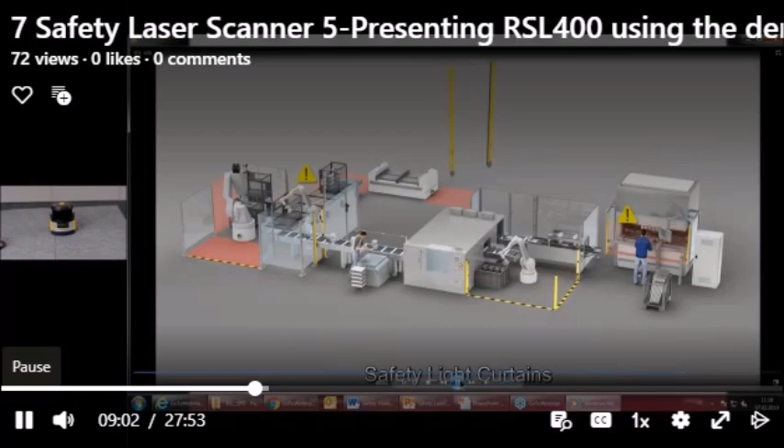So what I mentioned before, you either can do this using this video clip, then everything is done on its own, let's say, or you do the same things we have just seen by presenting the items using the brochure or the PowerPoint.

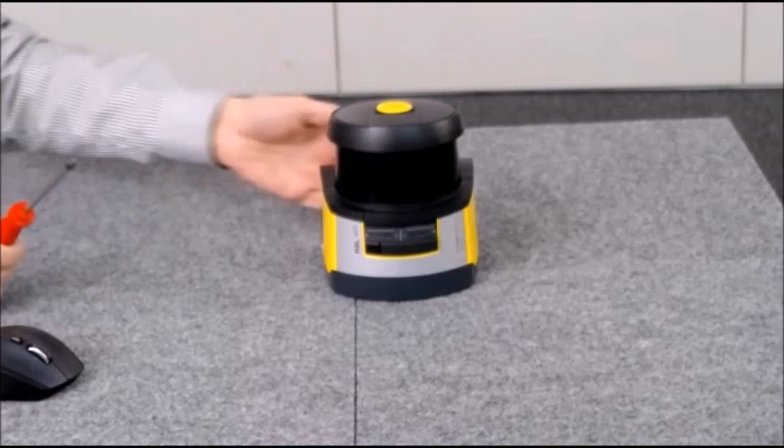Once this is done, and I said this is now for a quick presentation, what I suggest to do is when you take the hardware from the demo case and show a few elements what we have seen before.

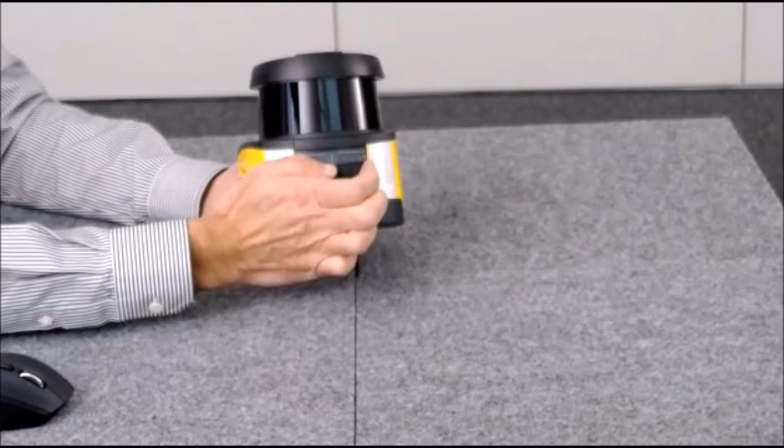I think what is worth mentioning is this is the area where we see the built-in display. We have the USB interface here installed at the front of the unit. That's good to show. Show the different ways how the connection works.

We have the power connection in the middle. We have the Ethernet connector as a standard for all our devices, networking capability for all our devices.

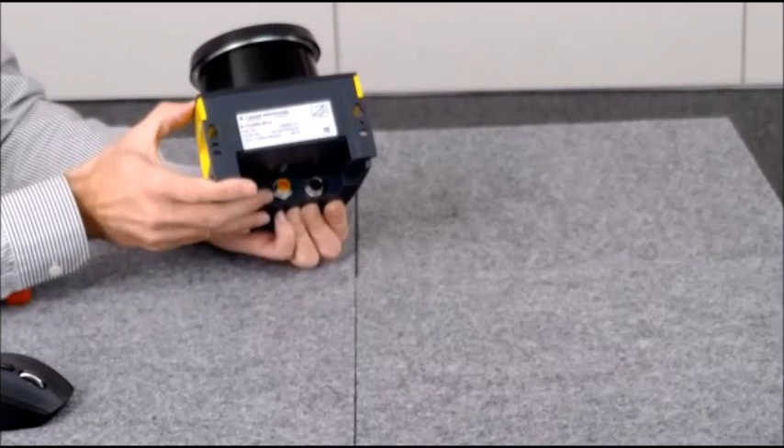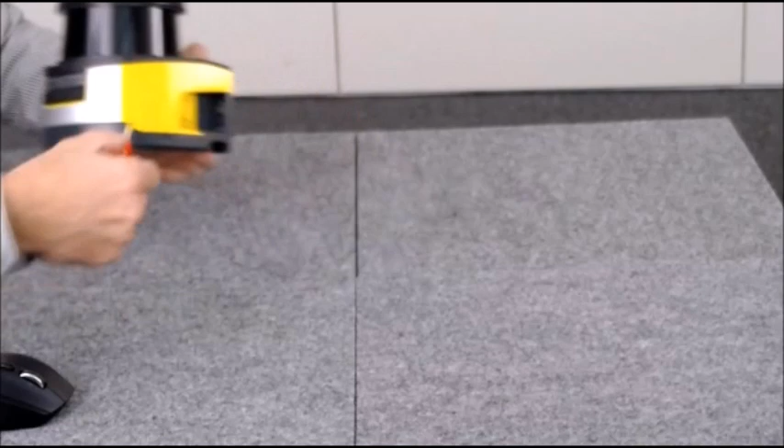And what I think is always very impressive to do is also show the detaching. That's why I said to make sure you take a screwdriver with you when you go to the customer, because now you can show one quarter turn, another quarter turn on the other side, and how easy it actually is to detach the scanner head from the base unit.

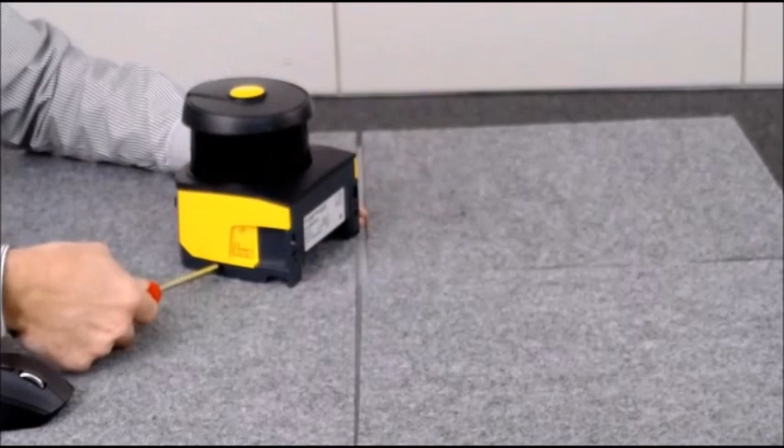What always works pretty well is also giving the base unit on its own to the customer. They are always interesting to take something in the hand, look at the hardware, and at the end put it back here with just the two screws again, and the unit is back to operation, as we would say in practice. So just a few things.

Give the hardware to the hand of the customer, explain some of the highlights, and this would be the approach for a very quick 10 to 15 minute demo.

Next, we will talk about how to extend the demo if we have more time available, for example, at least 30 minutes. Therefore, you see I have connected the unit now to the power supply as well as to my computer. And the things we would like to show in addition now are some live parts.

You have here a little note on your presentation about what I will be showing next. So we will show how the RSL works in practice when we trigger the protective and the warning field, some messages on the display, and also a little demonstration that the RSL, due to its high resolution, is able to distinguish a pen, a small device, from a larger device.

Well, first what we need to do when the unit is connected, we need to open Sensor Studio on our PC. We will see in the How to Configure session there are two parts of software needed. So I open Sensor Studio on my PC, I select the RSL, and then the software will search for the connected RSLs to the computer.

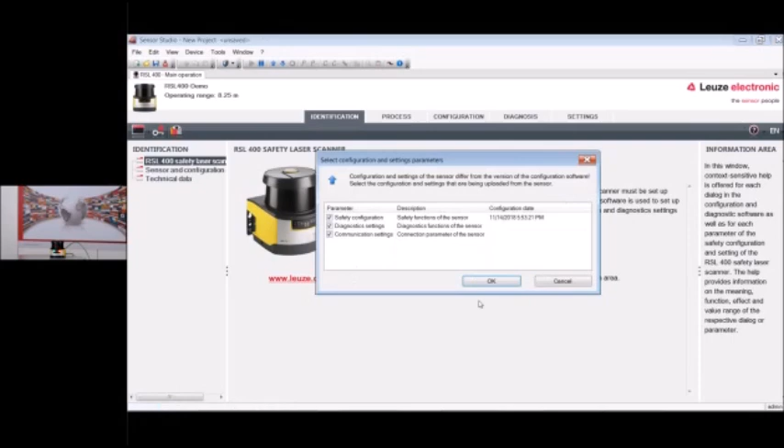So I do see the device here, press next again, and then the Sensor Studio software will open and will connect to the RSL device.

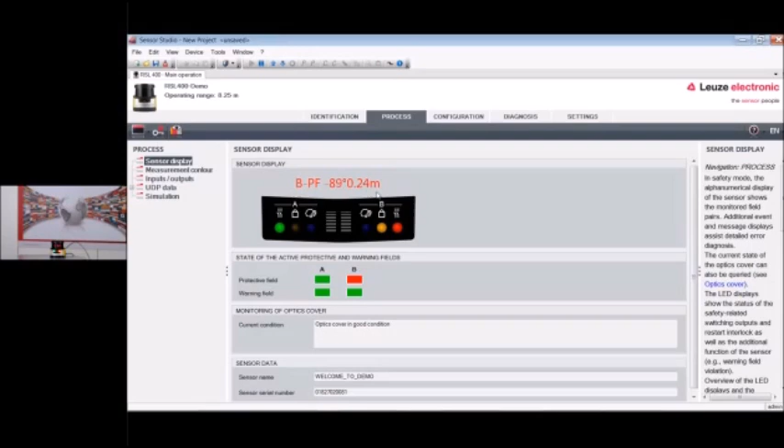Well, the first thing which is good to show is what the unit is seeing right now. This is available here in the process button. First you see a kind of online view of what also the unit is showing. So you see on the smaller image, the live image right now, how the LEDs are blinking in front of the RSL.

Actually, this is due to this cable, which is a little bit in the way of the scanner. So now everything is green. The scanner is working perfectly, no interruptions, and we can take a look at the so-called measurement contour, so what the scanner sees from its environment.

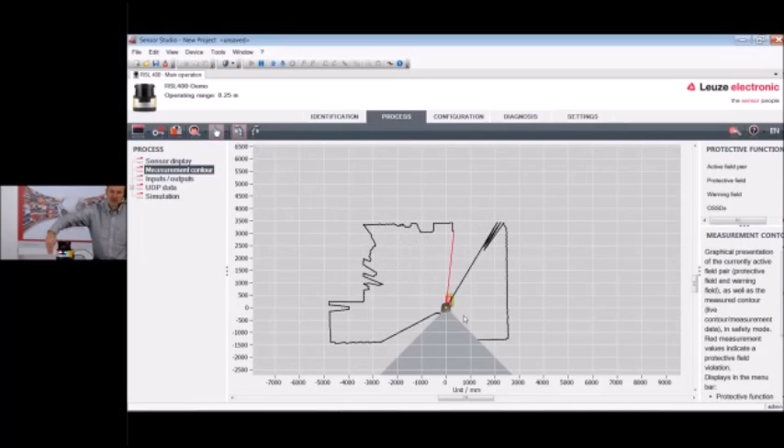And right now we do see myself. You see when I'm moving here on my chair, you see this, and I will go a little bit closer here to our live image. So if I move my hand around the scanner, you easily can see how well the scanner is detecting the contour of my hand.

The other circle or rectangular shape we see here is the shape of the room where we are presenting right now. This may be a first step, because if you're in a customer's environment, usually in a meeting room, you would see the meeting room and maybe even some people sitting in the room showing this contour.

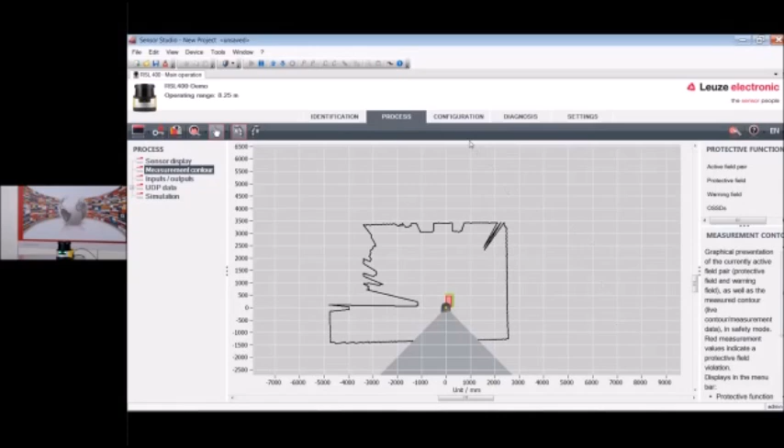Next, let's take a closer look at the protective and the warning field. I'll zoom in here with my mouse. You see two fields I have configured, and to show this I need to get a little closer to the unit again.

If I trigger here from the side with my hand, getting closer to the unit, you first see the green field, the warning field, being triggered. You see the blue lamp on the RSL switching on, which indicates a warning field violation.

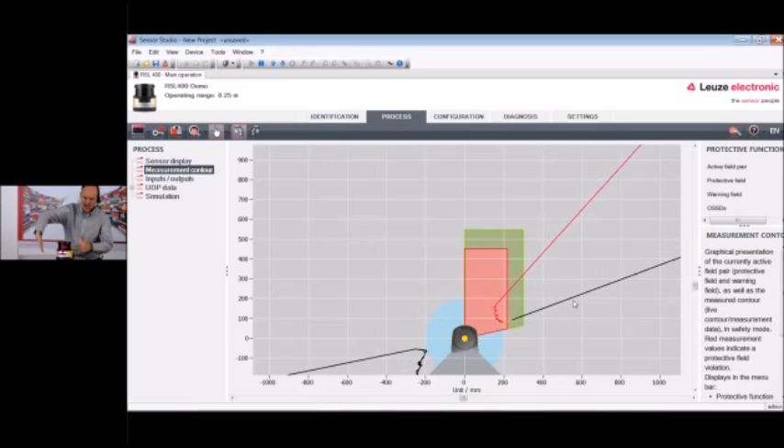Then I get closer to the red area. The red LED switches on, which triggers a protective field violation. At the same time we also see the information on the screen, on the display, which shows what's happened on the scanner right now.

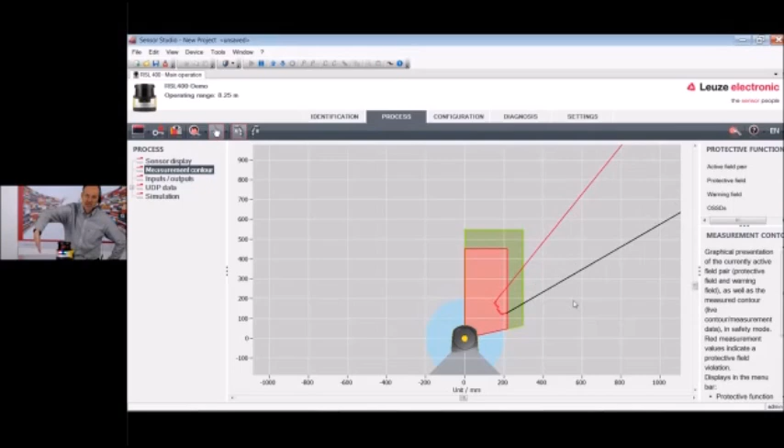You see here the information about a distance and an angle, and this is where the scanner detects the protective field violation. In this combination, it's also a good way to show the integrated display, as well as the principle of how a laser scanner works, how well we can see everything here in our software, and how it triggers the different status information.

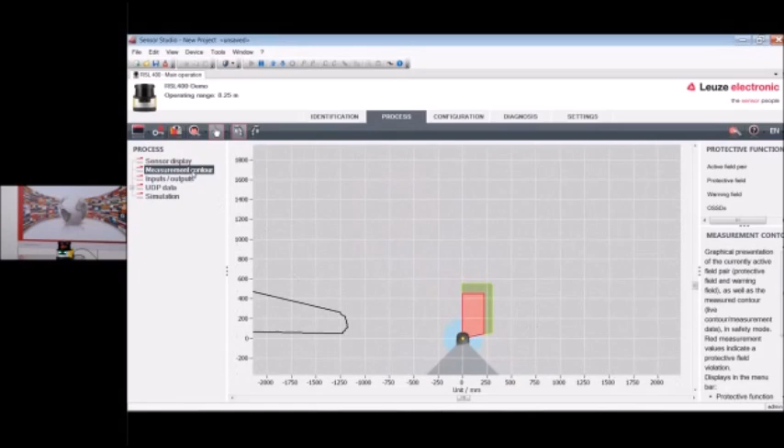Also, what you see here right now, we changed this last year. If I go back to the sensor display, this is the online view. On the small image on your screen, you see the two LEDs, the green ones.

Last year we changed the concept of the LEDs. They are very bright right now. You also see it here. That's also something good to show in the demo. Even if you are far away from the scanner, you very well see the LEDs, and you very well identify the information on the display.

What's also a good idea to show is the integrated spirit level. The spirit level can be switched on manually by going to the diagnosis page, and then you see here this little symbol of the spirit level.

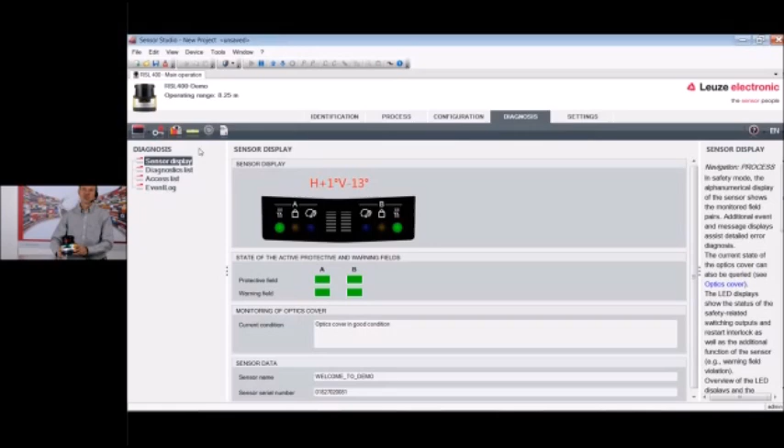So I switch the spirit level on, and again you see the information here in our Sensor Studio software, but of course this is something you would show the customer on the display. By moving the RSL, you can see how the spirit level inside the scanner works, and all the information is available on the display.

Another good part to present is the capability of the RSL to distinguish a smaller object from larger objects. So here there is again a protective field being configured.

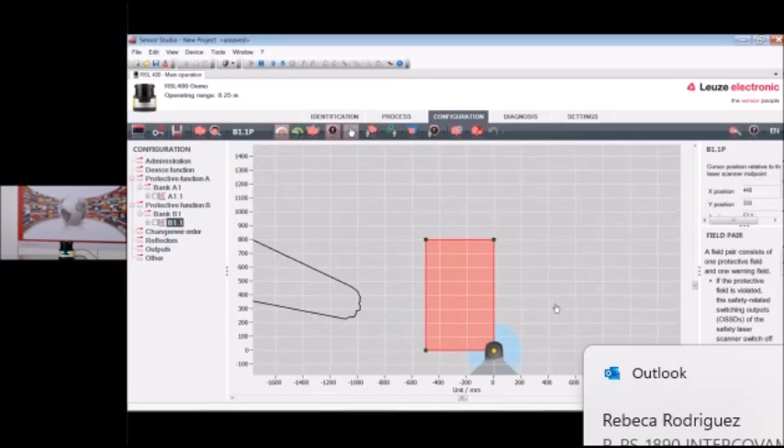We suggest that you use a protective field like I have here, which is at least about 80 centimeters, or maybe even a little larger, because this ensures that we can see this effect in a very good way.

Because what we do right now, we have to watch the LEDs at the unit. So obviously if I put my hand inside the protective field, we will see the red LED switching on.

And now I will come here with a pen, for example, from the top, and I will put the pen inside the protective field. I can move the pen around inside the field. You see it very well here in our online display, but at the same time you also see that whatever I'm doing with the pen, the scanner keeps running with the green LEDs, so it's not switching off.

That's also a very good effect to show during a presentation. The hand easily gets to the red light, but the pen inside the field remains with the green light.

Now we have seen most of the online presentation with the unit being connected. We did see the contour view, we saw the messages on the display, we saw the pen in the protective field. And if we want to do the demo in a little more in-depth way, there's a second page of recommendations on what to do.

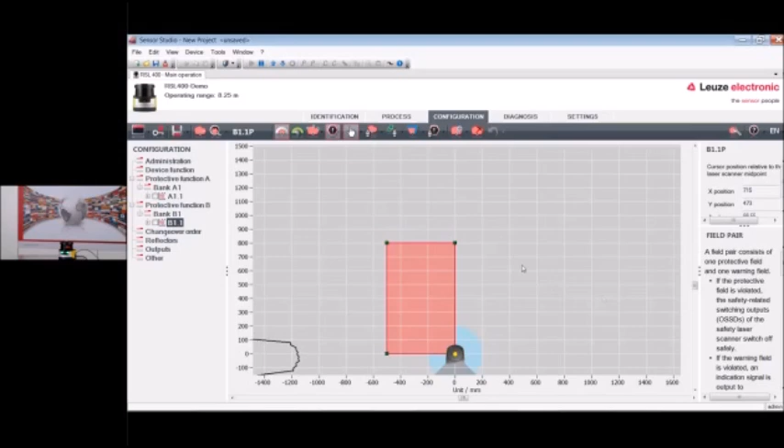Another point to mention is our built-in online help, which you see on the right hand side. For example, if I go to one of the configuration tabs at the beginning and select the item resolution, just as an example, you see the online capability explaining what resolution means. So online help is one of the features we can show to the customer.

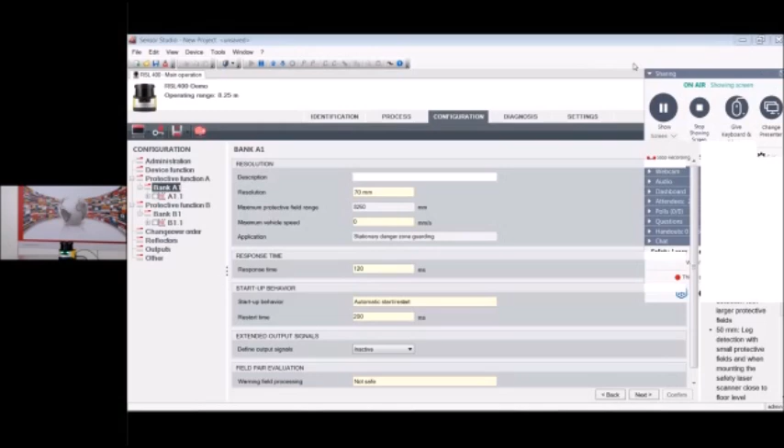And we also see here on this tab all the different languages we have available. This is at the very right. You see English being selected right now.

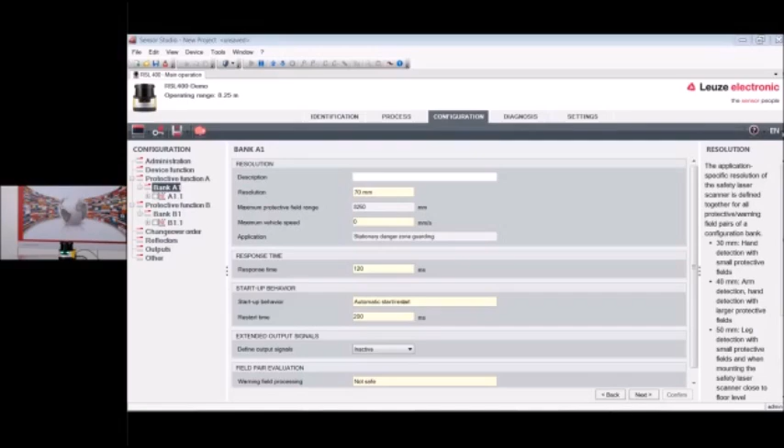At the very right hand side we see the English selection at the moment, and we can show here all the different languages we have available and which are supported in our software.

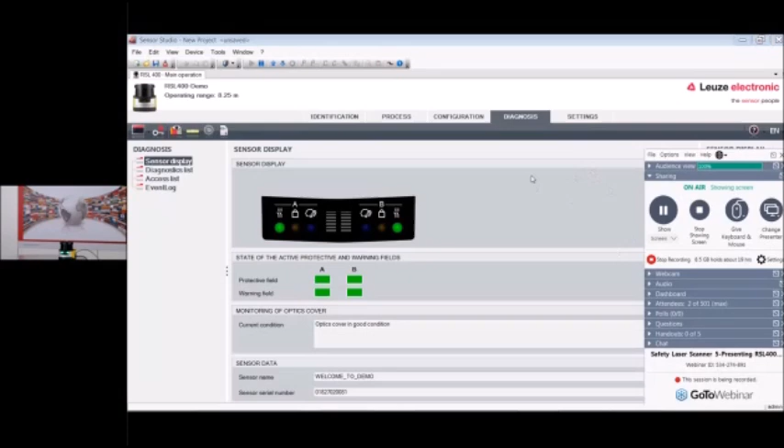I mentioned I would like to talk about the capability to do an automatic suggestion of a contour. To do so, we need to go to the configuration page. There's also one point which can be helpful for us: this little icon that says reset all safety configurations.

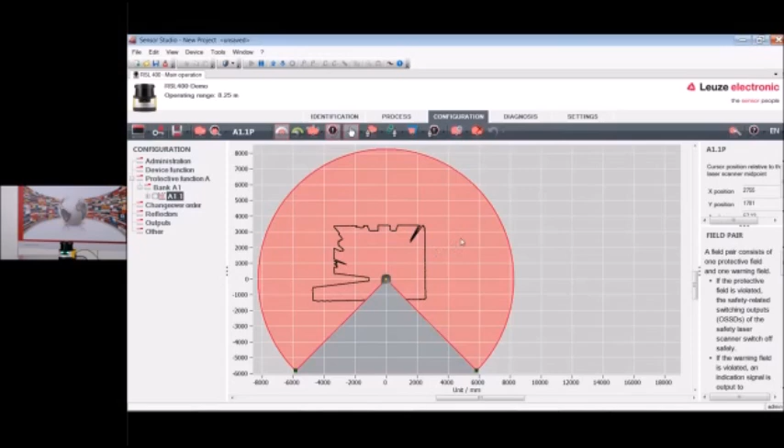What I will do in this case is that, so the unit goes back to factory settings. This is kind of the default page we will see, as said, setting in more detail on the next session. What I will do right now is I delete the contour.

Zoom in a little bit here so we can see our room better. Now I would like to show you how the scanner is able to suggest the right dimension of the safety field automatically. This is implemented here under this icon, called Create Contour Suggestion.

The RSL knows all the settings and knows the safety distance calculation formula. So for example, you see here the response time of the RSL, and the addition of 100 millimeters we have to do due to the size of the safety field, the working range.

What the scanner does not know is what is the stopping time of the entire system. So all the elements following the RSL, like the safety relay, safety PLC, and of course the stopping time of the machine itself, this is what needs to be entered in this field. We took 200 milliseconds as an example.

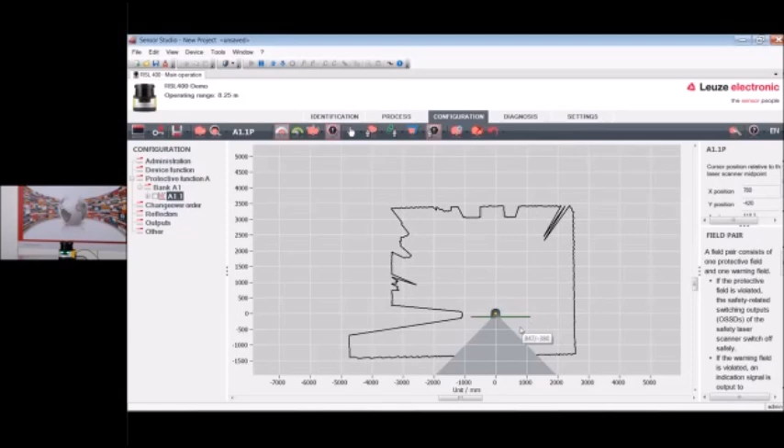We have to tell the scanner where the dangerous area of the machine is. Therefore, there is another icon up here called Define Danger Zone. So this is what I will do right now. I will define the danger zone just behind the scanner, indicating that right behind the scanner there is a danger zone exactly as big as this green line.

So now the scanner has all the information to automatically check about the dimension of a safety field. I start this process, press accept, and now the scanner has defined automatically the size, the optimum size of the safety field.

So why does it look this way? This is the danger zone, and what the RSL does, from any point on this green line, it is drawing the safety distance. It has calculated that the safety distance is about 1.7 meters. So here is a green line, and here we see a parallel line at 1.7 meter distance. Then there is a curve, because this is due to drawing a circle around the end of the line.

And the very nice thing is that this field is automatically fitting to the wall, or this, by the way, that's myself at the moment. So this could be a post, for example, in a hall. It's automatically drawing around any fixed boundary which is present in the view field of the RSL.

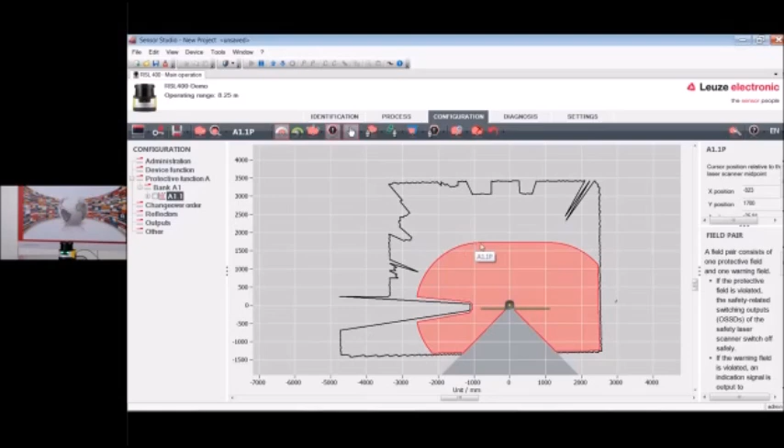So this is a very convenient way to do this automatically, and the curve shape is due to the safety distance calculation. Of course, there are many other ways how to do this safety field identification. I go back here, and I will also delete this danger zone, so we are back to zero.

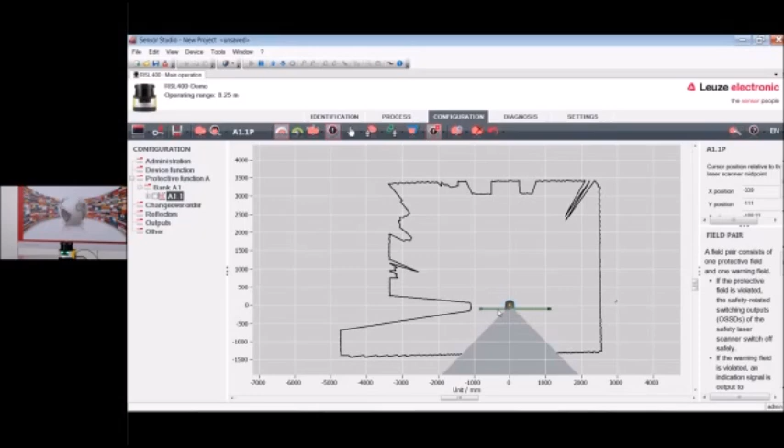Another way, of course, to draw a field would be a manual setup. So I use here define field with a polygon. This means I just click with my mouse the edge points of the safety field, and the RSL then would take the safety field as its configuration.